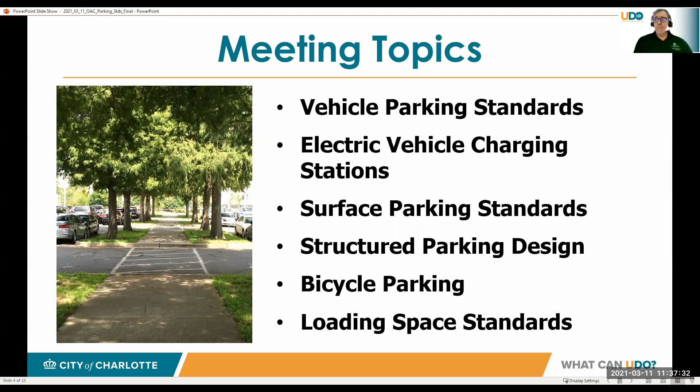So here are the topics for today: vehicle parking standards, electric vehicle charging stations—that's something new for us—surface parking standards, structured parking design, bicycle parking, and loading space standards.

So for our parking requirements, we are taking a different approach in the UDO than our current zoning ordinance. We're going to be basing parking requirements on zoning districts, which isn't unusual, but we're using a 3-tier approach alongside the zoning district. We're sorting each proposed zoning district into one of these 3 tiers for setting up our parking standards, and we'll go over how that's going to work.

But since we're basing parking on the zoning districts, I thought it would be useful to do a quick review of our zoning districts. This is what we've been talking about for the past many meetings, but just as a refresher, here are our proposed residential zoning districts. We've got the zoning districts for our neighborhood 1.

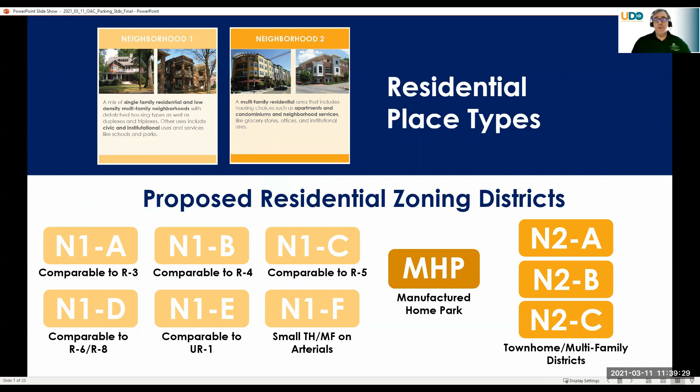They're all the N1, A, B, C, D, E, F, G, not G. We've got a manufactured home park district that we talked about in our last meeting, and we've got 3 zoning districts for neighborhood 2. So those are our residential districts. And then you've all seen this slide before, our version of it.

And it's at this point that I'm going to kick it over to Laura to get into more detail about the 3-tiered approach.

But at a high level, we have the first tier, which are really more auto-oriented uses, typically, not always, but where we would have the greatest parking standards, minimum parking standards, and we will not have maximum parking in these areas. Sorry, I have a visitor here.

We have a middle tier where we will have more uses that are not as auto-oriented. This is where a lot of our centers are, where we'll have both minimums and maximums, which is what we're proposing.

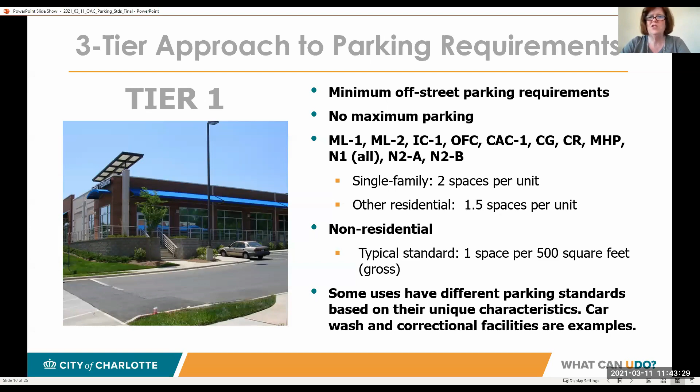Tier 2 is that middle tier. It's our innovation mixed use, the more urban campus, our neighborhood center, uptown edge, the more intense community activity center, regional activity center, and N2C, which is the most intense multifamily district. So in a minute, I might answer a couple of these questions too.

So these include both minimum and maximum off-street parking requirements. Maximum does not apply to parking structures. Typical ranges for residential are a minimum of 1 space per unit and a maximum of 2 spaces per unit. For non-residential, the typical minimum is 1 space per 750 square feet, and the maximum is 1 space per 250 square feet. So again, we have some different parking standards based on the unique characteristics of the use.

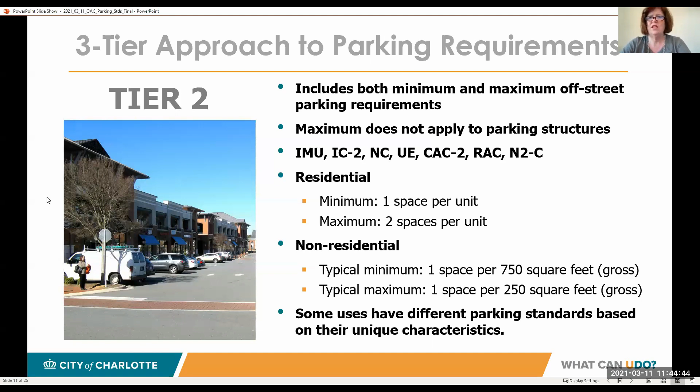Tier 3 is where we have put the districts that would have, in most cases, no minimum, and would be focused much more on maximum off-street parking requirements. These are our TOD districts and our urban center district, based on the current TOD approach.

With TOD, you have minimums only for a few uses: live performance venues, micro production of alcohol, nightclubs, restaurants and bars. That's only when they're within 200 feet of the neighborhood 1 zoning districts.

The standard is 1 space per 500 square feet, required when we have a minimum, plus 50% of the outdoor seating or activity area. Maximums are typically 1 space per bedroom, and for non-residential, the maximum range is currently based on 1 space per 200 to 1 space per 300 square feet.

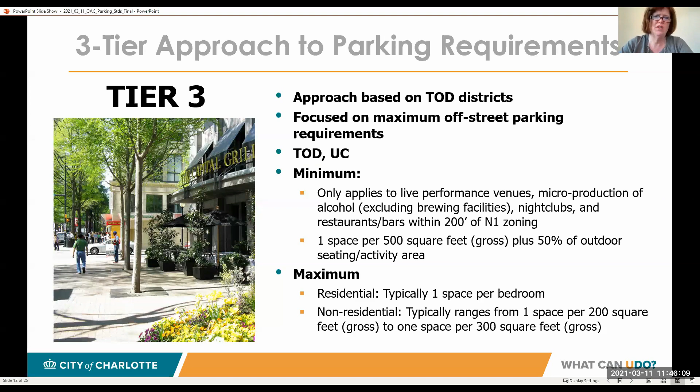Other vehicle parking standards, how we calculate vehicle parking spaces, are based on the use. If it's mixed use, then you add up the requirements for each of the individual uses.

They're required when you have new construction of a principal building, when an existing building is expanded resulting in a requirement of more than 5 additional spaces from what's on a site, and also for a change of use resulting in a requirement of more than 5 additional spaces.

We do have some parking that is exempt from the parking maximums: accessible parking spaces per ADA, which we obviously want to support because we know that's really important for the community. We also have some of the EV charging, which we'll talk about in a minute.

If EV chargers are installed, they would not count against your maximum. Pickup and drop off areas, as long as they're signed for that, and on-street parking abutting the site wouldn't count towards the maximum. Then there's visitor spaces under certain conditions for townhomes and multifamily.

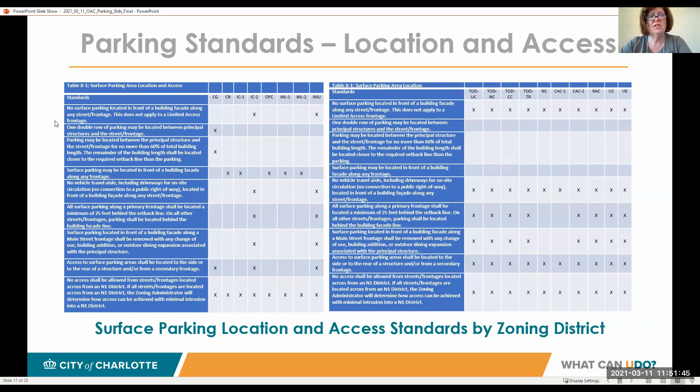The last standard, which we're proposing for all of the non-residential districts, is like we do in TOD: moving the access away from our neighborhood 1 districts and areas, when there's the opportunity to do that.

We also, like in TOD, deal with design of parking structures. So there are some standards that all parking structures would meet: screening of vehicles, which we have in our current ordinance, and vehicle clear sight zone, which is really for safety from a transportation perspective, and visibility.

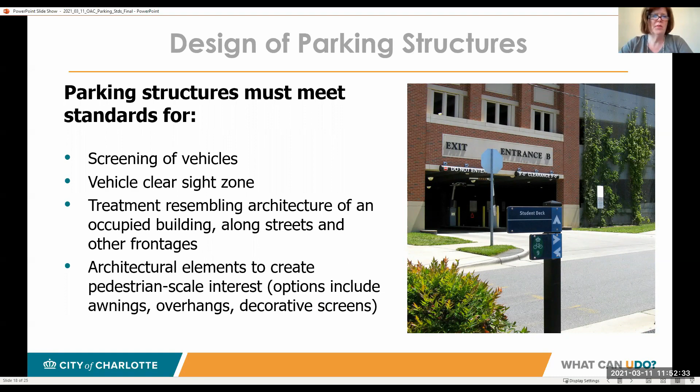Treatment of decks should, at some level, resemble the architecture of an occupied building, along streets and other frontages. So it's along the street, not the other parts of your building, with architectural elements to create pedestrian scale interest.

We also, depending on your frontage type—whether you're a main street, an arterial, a primary frontage, secondary frontage, parkway, and so forth—and based on your zoning district, we have requirements, like we do in TOD, for different types of treatments of parking decks.

Option A is the most design intensive, where all floors are wrapped and there's ground floor activation. Option B has ground floor activation and a step back for other floors of the deck. Option C is simply ground floor activation. And option D is having a setback with the landscape area.

So you'll see those kind of standards from TOD expanded to other districts. And in some cases, depending on the district, some of this may not even apply, but it really depends on the context in which these districts would be located.

Thanks, Laura. I don't know, Alan, if you want to stop now and have Arista and Chris help with answers, or do we want to keep going and come back?

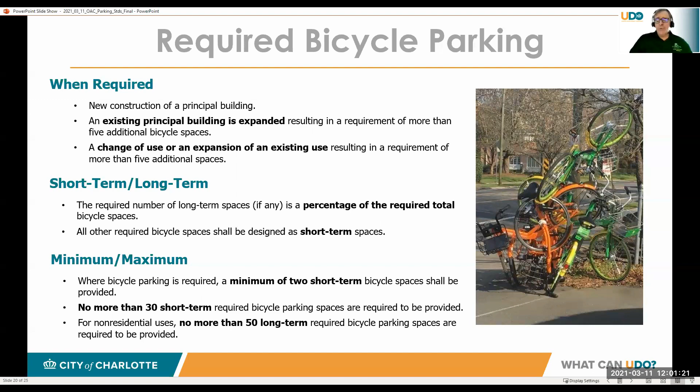So there are 2 different types of bike parking, short-term and long-term. Short-term bike parking tends to be the bike rack that we're all familiar with. The city has standards for bike racks in its land development standards manual, and there are a couple of different approved short-term bike racks. But if a designer wants to go outside the box a little bit and design their own bike parking racks, they can do that and submit it to us. And if it meets the intent of our ordinance and if it's secure, we may approve it as an approved alternate. So those are the short-term bike parking options.

It can be under a roof, as long as it's in an accessible area. The thought being short-term bike parking is for visitors to the site who are only going to be there for a relatively short period of time, and then they're going to get back on their bike and leave.

Long-term bike parking may be for employees who ride to work and their bike is going to be there all day long, and it needs to be stored out of the weather in case it rains during the day, or for a residential facility that requires bike parking, where you know you're going to be parking your bike for a long period of time. So those are the two different forms of bike parking that we have.

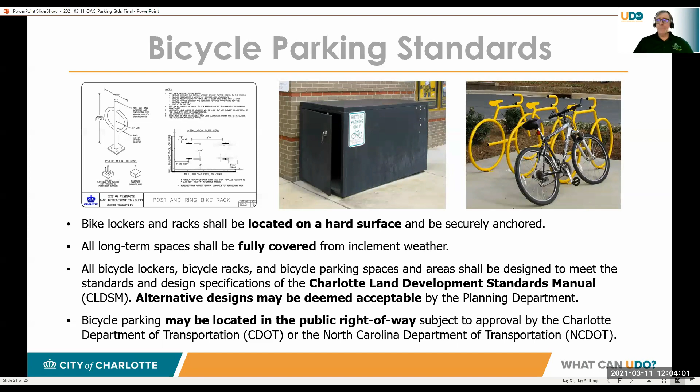Okay, I'm not familiar with the process that they're asking you to go through. So, yeah, we can cover that at a different time.

But not all uses will have a bicycle parking requirement. Some residential uses like single family, duplex, tris, quads, and townhomes won't have a minimum bike parking requirement. The thought being that if you live there and you have a bicycle, you're going to figure out where to keep it, either in your garage or in your apartment or in your unit.

And then other uses, commercial uses such as auto-oriented uses like car washes and gas stations, where you're not likely to arrive by bicycle—although you could be an employee and ride by bicycle, I suppose—or industrial uses like a junkyard or recycling center, where again you're typically not going to be arriving by bike, will not have a minimum bike parking requirement.

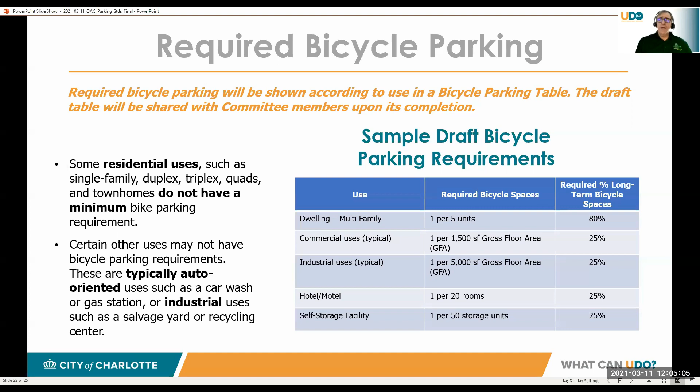So that concludes our slides, and be happy to go back—Thomas is chomping at the bit to say something. So I know exactly what he's going to say too.

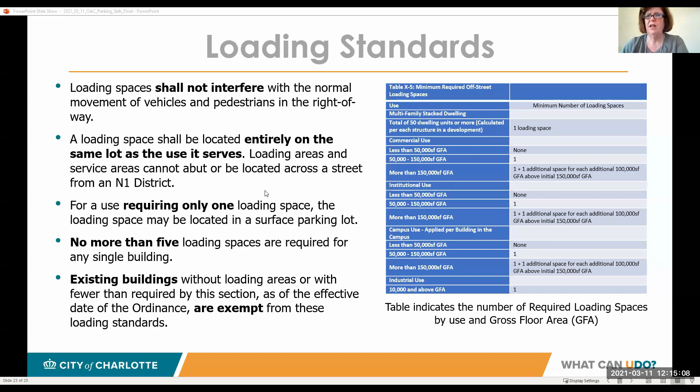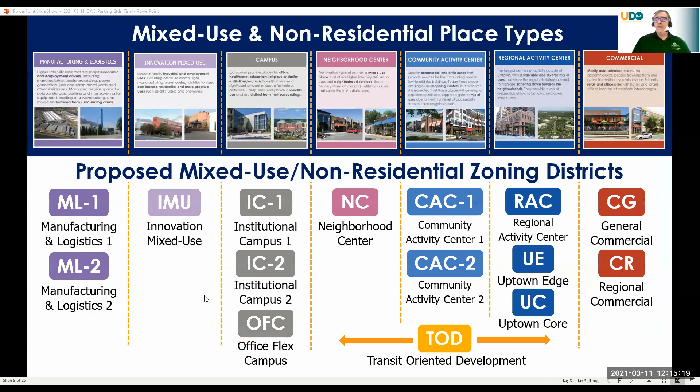I had liked to scroll through the chat and had a few topics maybe for discussion, if that's okay. Absolutely. And the first one I had was EV charging. But I wanted to know if you could go back to the policy on that, because I do want to point out that we're just not pulling this out of the air. Yes, it's policy 7.6 on the screen, coming from the comp plan policies.

So we do think that we're seeing this in a number of other communities. I think Arista and Chris might be even able to see what they've seen in other communities. And we don't want to get, as a community, caught flat-footed. But there was some chat about EV charging, and I'd like to open it up, if everyone's okay, to just kind of see what different folks think about having some requirements related to that.

And Laura, before I ask, I'm going to maybe put Michelle Manns on the spot a little bit if she's with us. And I see John Friday has got his hand up as well. But we were concerned, as we were talking about requiring EV parking stations, with what the industry was doing in Charlotte today on its own without any requirements. Were development projects putting EV charging stations in without being required to?

And so Michelle Manns from the Greater Charlotte Apartment Association was good enough to do an informal poll of some of her members. And if my memory serves, a great deal of them, if not most of them, were including some EV charging facilities in their projects as new projects were being built. I don't know, Michelle, if you're here and if you want to add anything to that.

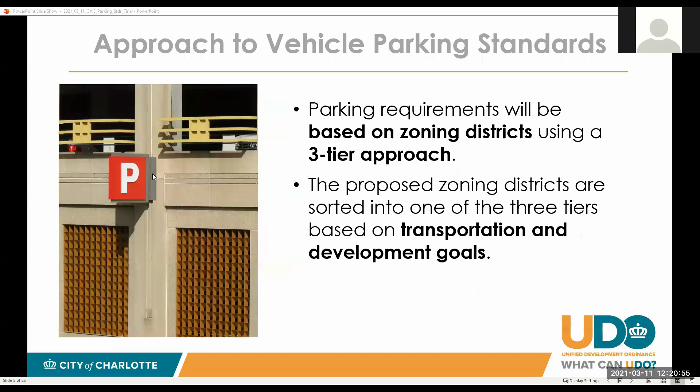My question really has to do with parking. So what I see tier 1, 2, and 3 doing is they're reflecting a transition from least dense development to the most dense and the most urban. So in N1, it's a certain level. When you get up towards TOD and the others, it's quite different, which is, I think, the way it should be. So the difficulty comes when we do place type locational decisions, and that is we put place types so near to N1, N2 that the parking overwhelms it, because the place type is in effect a tier 3 place type that shouldn't be next to tier 1, as we've seen with the TOD and some of our recent discussions.

And one of the comments mentioned is do residential parking permits. But we're also talking about making it really easy to put bicycles in the public right of way with a simple form. And to get a residential parking permit would probably take an act of Congress and the city council. So I think both of those should be made really easy in the ordinance if we're going to use that in the ordinance as our solution. I think the better solution is to figure out the right parking for the place types that go near the neighborhoods that would be overwhelmed by too much development that close. So as we get to the place type mapping, that's where this is going to be really critical. That's all, thank you.

Anyone else want to raise their hand, and we'll, any feedback on this? I know there was a fair amount of chat on the concept of spillover parking and thoughts. Is that Eric raising his hand?

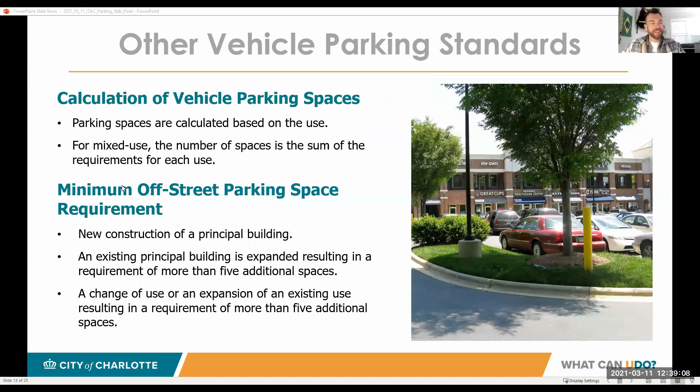Clarify so others before they throw their comments in, just looking at what districts that applies to. I think including the neighborhood center and maybe even the N2C in that, I think just evaluating that, looking at what actually would have a parking deck in it, all that kind of stuff. Maybe just making sure that it makes sense for all of the districts is kind of what I'm concerned about.

It was our thinking that parking structures are pretty expensive per space, and that generally speaking, nobody really wants to spend more money than they have to on building additional parking spaces. So that's one reason why we didn't end up with a parking maximum for parking structures in that district, is that we just didn't think we really needed it, because nobody was going to build giant parking structures if they didn't need the parking.

And I don't know about that. A lot of people continue to build those garages because they feel like they need to. I know they don't want to, but we just see parking decks going up all over the place, even in Uptown, and it's just crazy. We have so much parking, it outnumbers all of us, the people versus parking spaces.

I think those are interesting thoughts, and we were trying to find that middle ground, but I'd like to know, does anyone else have thoughts on that topic? Someone raise their hand.

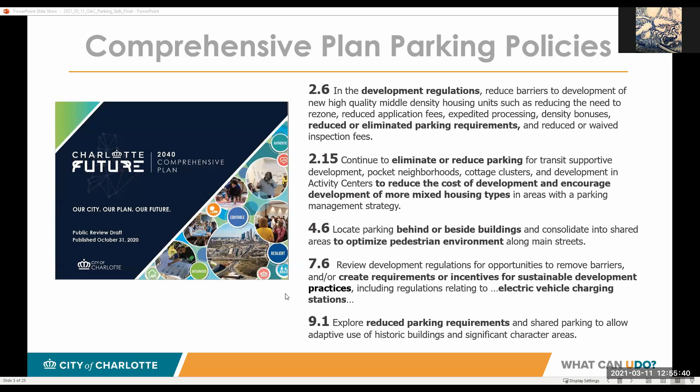It's a fairly common program across the country. I don't know if there's anything else you'd like me to add, but it wouldn't be related to this effort because it's a completely different authority that something like that would be issued under.

Yeah, I'm just saying it would affect the amount of spaces. If we know we can put a couple hundred cars in a given area on the surrounding streets, then we don't have to have 200 spaces in dedicated parking lots or decks.

Yeah, it's a tough thing to tie parking requirements in the zoning to something like that, just because a parking permit situation is so much more fluid than land development regulations, and subject to change. As Arista was saying, you get a bunch of your neighbors and go to the parking authority, and suddenly a lot of that on-street parking is gone. So then what do we do?

It's a very risky thing, and I can't speak for Arista, but I haven't seen it anywhere where zoning requirements related to parking are tied to a permit. No, the two have never been tied together for the exact reason, Chris, that you said—it's a very fluid system. It also has to do with enforcement: you can have the permits, but if you don't have the enforcement, it doesn't matter. So it's never been tied to parking requirements or establishing minimums and maximums, because of that situation. You could have metered spots for years, but then all of a sudden that street needs to expand and take that lane, and those spots are gone.

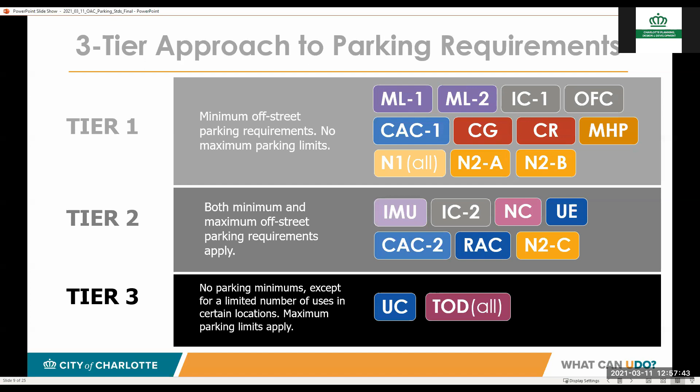Good afternoon everybody, this is Kevin. I just wanted to say a quick word addressing both Brent's and Ellen's comments. Neither of your comments are falling on deaf ears. We actually have with us today some CDOT representatives. I'm not going to call them out or ask them to comment unless they'd like to volunteer, but Brent, you expressly asked how we get from where we are to looking at management of parking on street. So I just wanted to let you know there are ears in our audience to where both your comments have been heard.

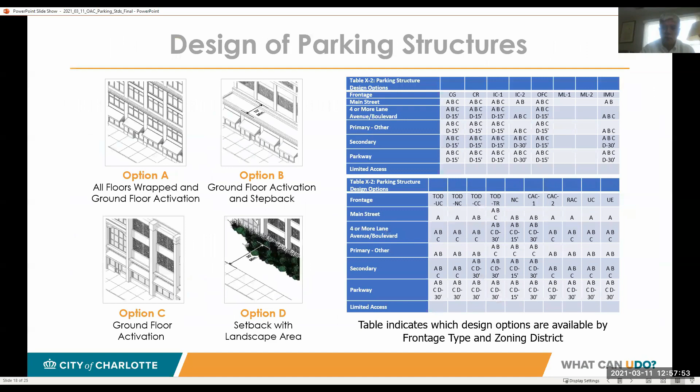Okay, good, thank you. Thank you, Kevin, because I actually think I was going to call them out. But I also—

Want to ask Alan, as you were looking at the comp plan, and we've got a couple folks from the comp plan team here, is there discussion in the comp plan about parking permit systems at all? Does anyone remember? Laura, I didn't come across any, and Kevin, I know you looked for parking comments for us as well—I'm assuming you didn't find any, otherwise you'd have brought them out. Yeah, that's correct. Everything I found at a high level regarding policy initiatives in the comp plan was already referenced by our team in an earlier slide, and they really spoke to provision of levels of parking, not necessarily parking management programs per se.